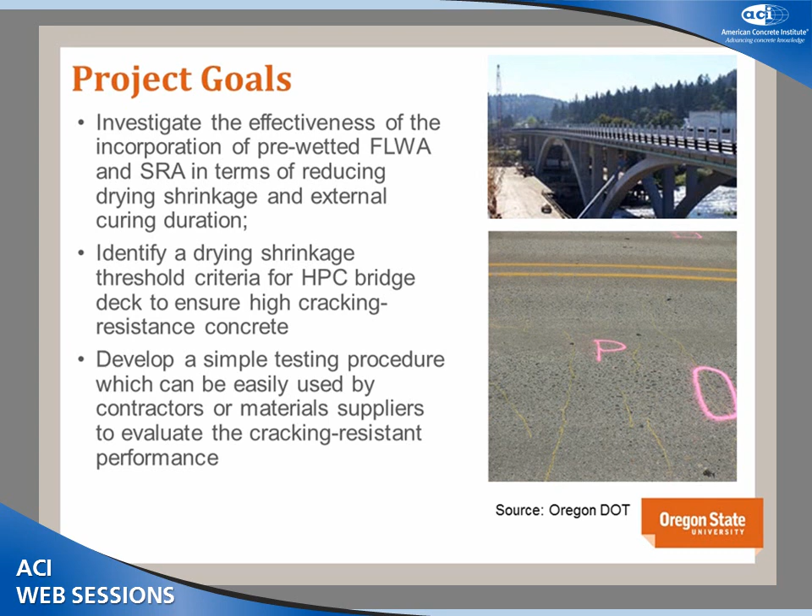And to that end, we want a pretty good mathematical description of the drying shrinkage and its development. So that's where this particular project comes in. We tried to find a model that will describe the drying shrinkage behavior satisfactorily for our mix with fine lightweight aggregate and SRA concrete, and also, hopefully, if you change to different local materials in the mix. And we pushed a little bit further than that. We looked at the ACI 209 drying shrinkage model and came up with a way to predict long-term shrinkage based on short-term measurements. So a combination of the modeling and the experimental work.

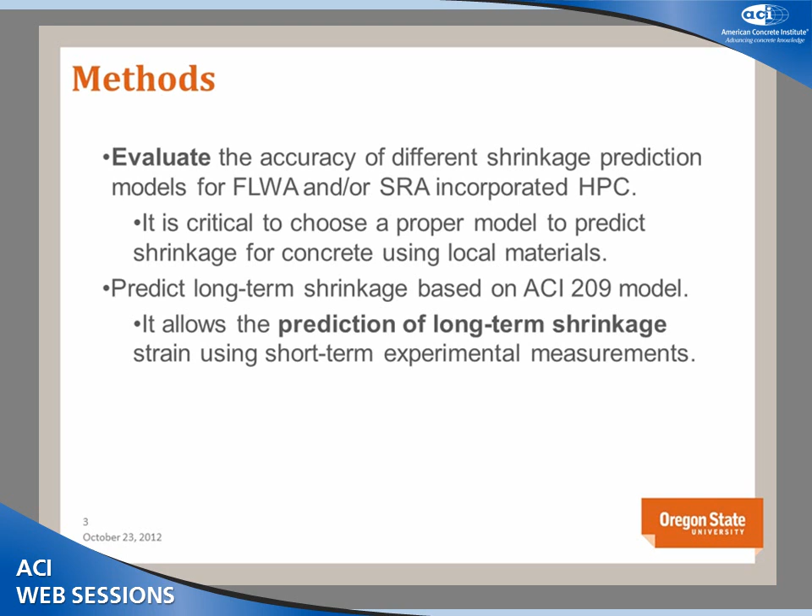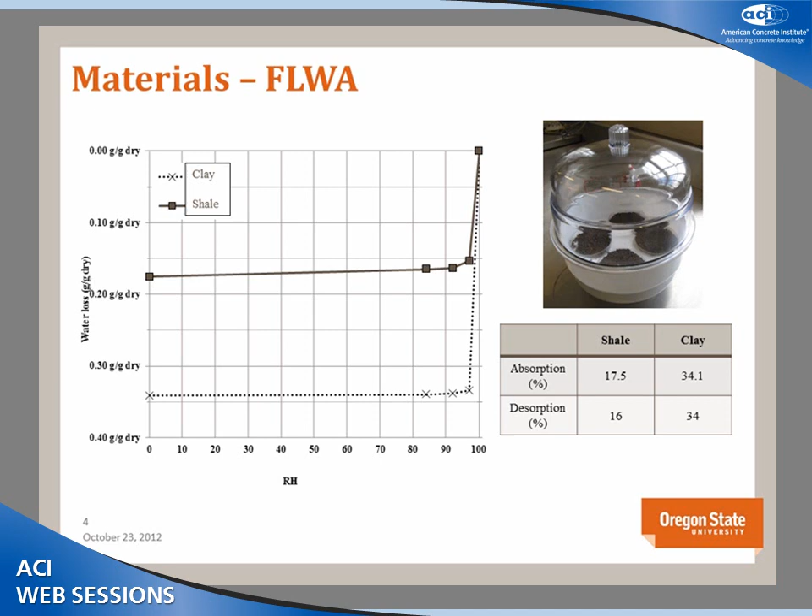A little bit about the material side. We have a couple of different sources of lightweight aggregate, mostly shale, but one source of clay. Most of the work has been done with one shale and one clay. This curve is the desorption test. The takeaway is that when the relative humidity drops below 95 or 96%, the lightweight really starts to give out most of its moisture. Another takeaway is that the absorption capacity for clay is almost twice as much as the absorption capacity of the shale. That's going to affect the calculation when you want to figure out how much lightweight fine aggregate you want to put in your mix.

So here's the mixture design. We use a cementitious material content of 633 pounds per cubic yard, and we kept all our mixture designs at a w/cm ratio of 0.37. And we use a ternary blend, which means we replace 30% with fly ash, that's class F fly ash, and 4% with silica fume. And in several of the mixes with SRA, there's a 2% SRA addition based on the mass of cementitious materials.

And also, if you look at this list, we have 3 different levels of clay replacement and 4 different levels of shale replacement. One point to point out is that the clay at 12% and the shale at 25% are identical in terms of the internal curing water they can provide. And that's based on the chemical shrinkage test and the equation.

And also, we wanted to push it, to really see what's the limit of prewetted lightweight fine aggregate. So we tried 100% shale. That means there's no natural sand in it, just 100% shale lightweight fine aggregate. And we also tried a 25% replacement of shale plus SRA to see if there's synergy going on there. And the targeted 28-day strength is 5,000 psi, 34.5 megapascals.

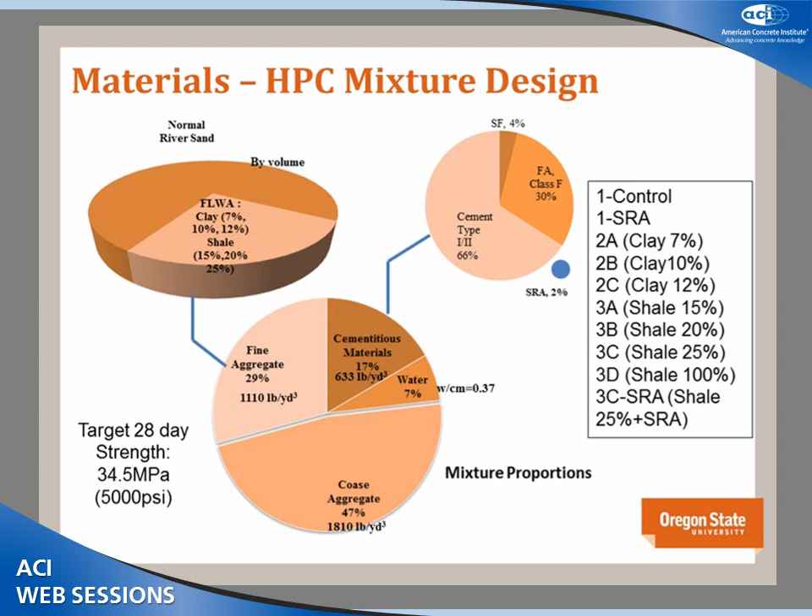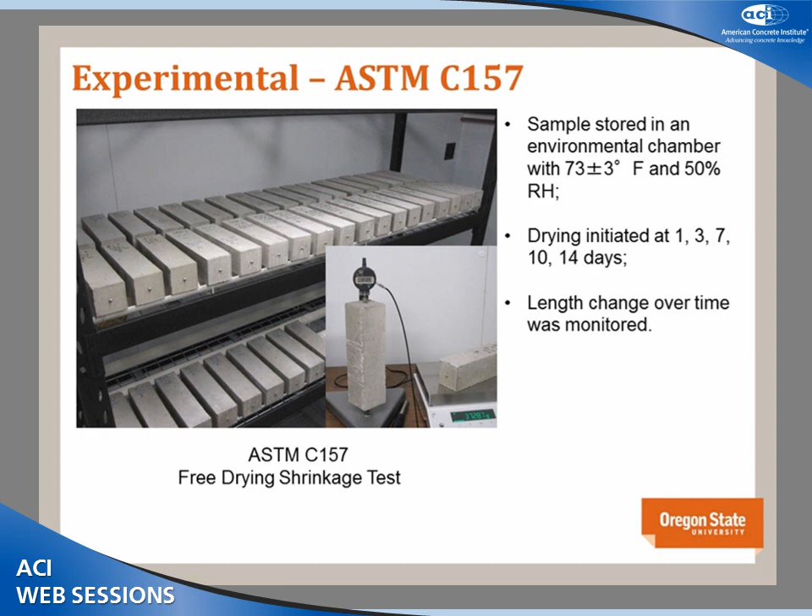So basically, a lot of work has been done just casting bars. We did a lot of ASTM C157 tests, which is the measurement of free drying shrinkage. We store all the samples in an environmental control chamber with standard conditions, and we start drying at different ages, from 1 day, 3 days, 7 days, 10 days, 14 days, and we keep tracking the length change. And each measurement is going to be a point for evaluation in the later slides.

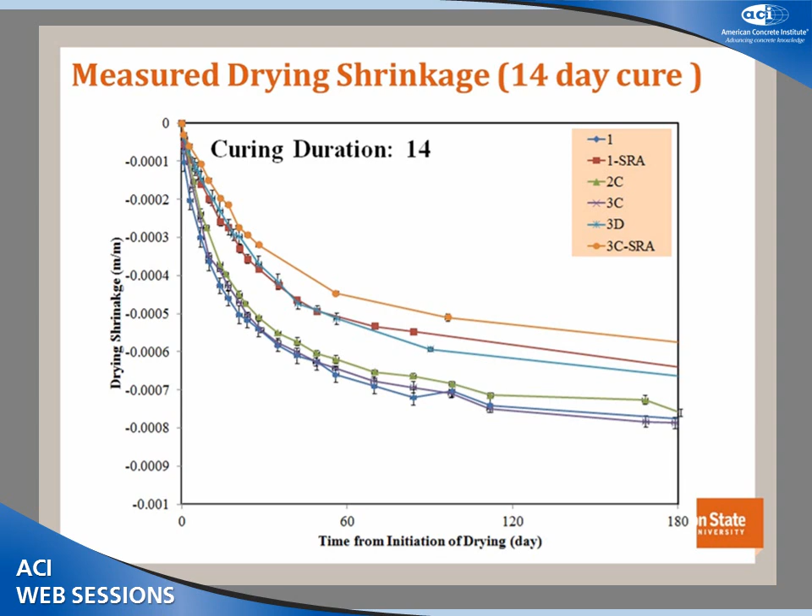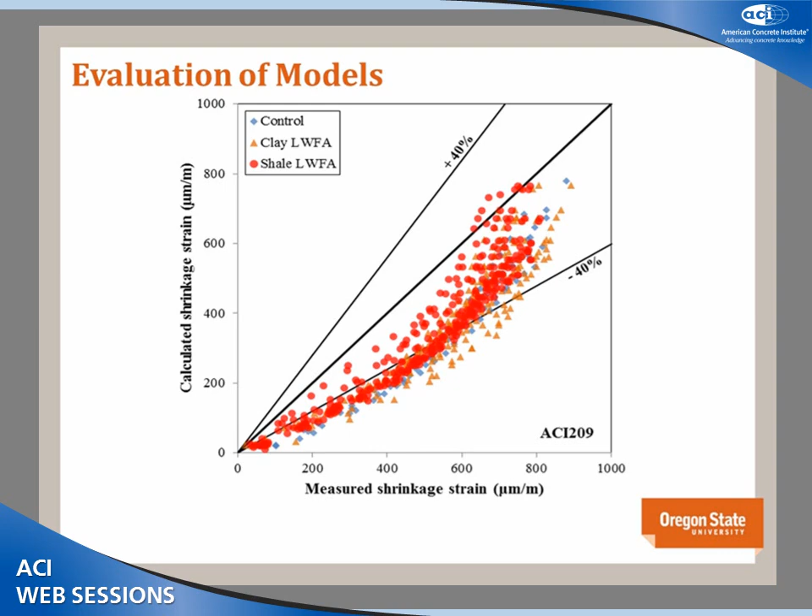This is the designation of the code. If a point falls on the diagonal line, that means a good prediction, and I also give 2 reference lines of plus or minus 40% difference. And up here is the legend. The blue diamond is the control. This means just pure HPC. The orange triangles are the ones with clay, the red dots are the ones with shale.

Okay, back to this. So 6 models we've been looking at. The ACI 209 model, the CEB 90 model, some people call it CEB 95 or CEB 99. That's from a later version of the European code. I think the newest one, which just came out in March, is called CEB 2010, which tries to combine autogenous shrinkage with drying shrinkage, plugging them into one equation. But I think the time function in that model is still pretty similar. That needs some work to update.

And the AASHTO code, which is mainly used for prestressed concrete girders, is really closely related to the ACI 209 model.

And the B3 model is the one with a theoretical basis, which tries to explain the physical mechanism behind drying shrinkage. And that model is very alive. I think the newest version is about to come out at the end of this year, then this model could update too. And also the GL 2000, I put slash here, ALSM model, because they work exactly the same when we look at concrete without SRA. And the ALSM model is developed very specifically for concrete with SRA.

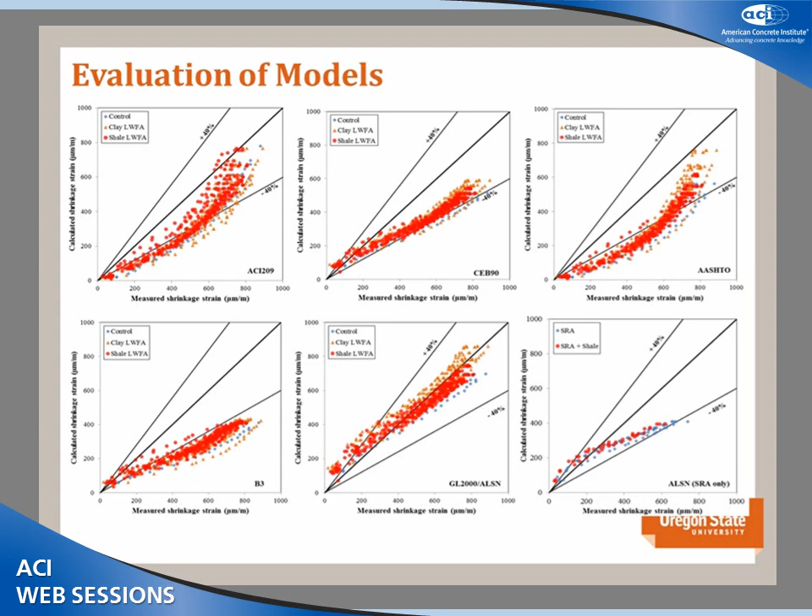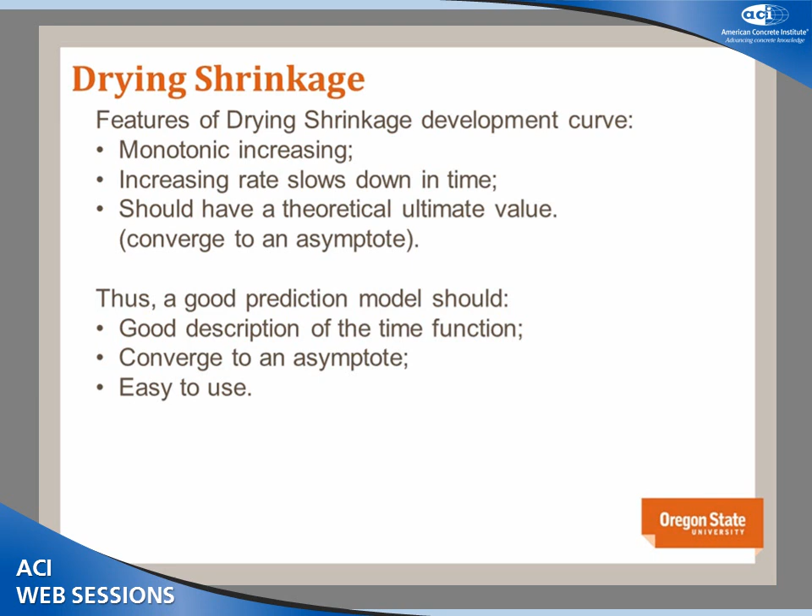So what if we can have a mathematical description of the model based on the test? Then we can predict the long-term behavior. That would be pretty cool. So first we look at, well, what's the characteristics of the drying shrinkage. So basically the assumptions are it is monotonic, the rate slows down in time, and also it should converge to a certain point, which makes sense that the shrinkage should stop somewhere down the line. So a good model should have an accurate description of the time function, as well as an ultimate value it converges to. And ideally, it should be easy to use.

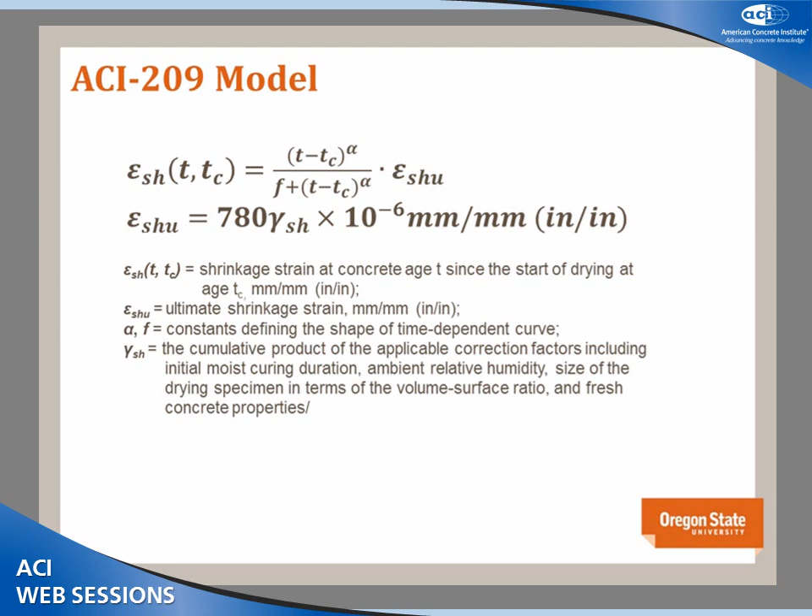So when we look at all the 6 models we use, the ACI 209 really caught our eyes. This is the full version of the equation. You've probably seen the simplified one with this factor set to 1, and this F factor set to different values for different concrete. But if you look at the full function, there are 3 factors, alpha, F, and the ultimate shrinkage value. If you manipulate those 3 parameters using regression, you actually can represent the time function of each of your mixes very well, and it can give you a reasonable ultimate shrinkage value.

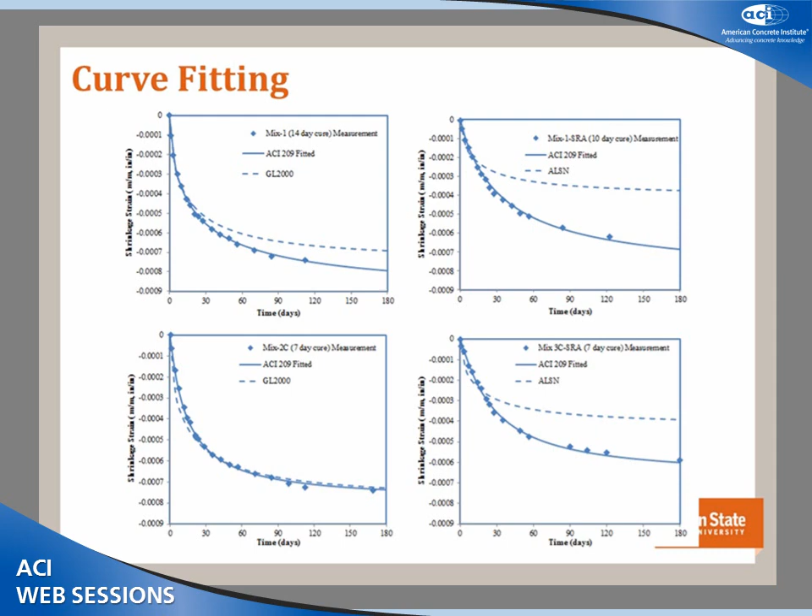So as an example, we just randomly selected several different mixes from all kinds of work we did. The dotted line is the actual measurement. And the dashed lines are the different models. The solid lines are curve fitted using the ACI 209 model. So they really capture the features of this line and hopefully can project to a longer term value reasonably well. And you can look at the left corner, the one with the GL 2000 model, which works pretty good. You can still see a little bit of improvement there. It really captures the time function of the drying shrinkage curve.

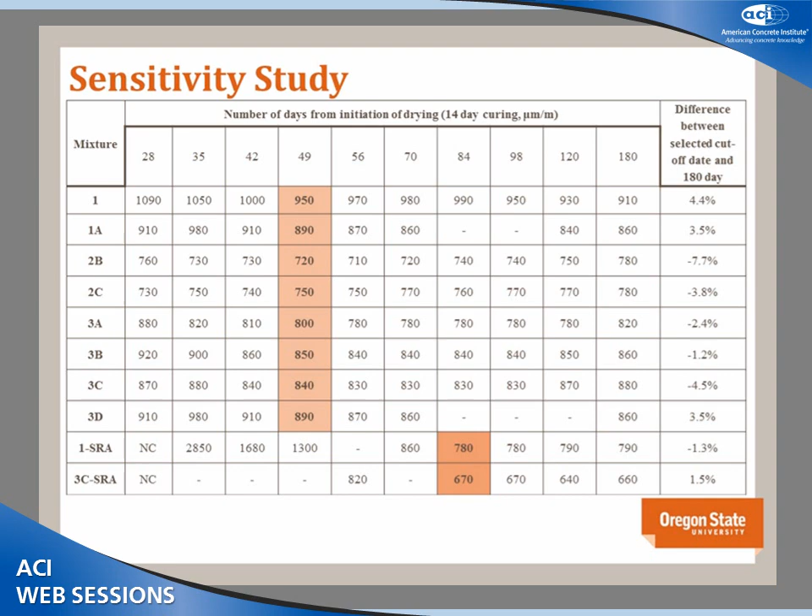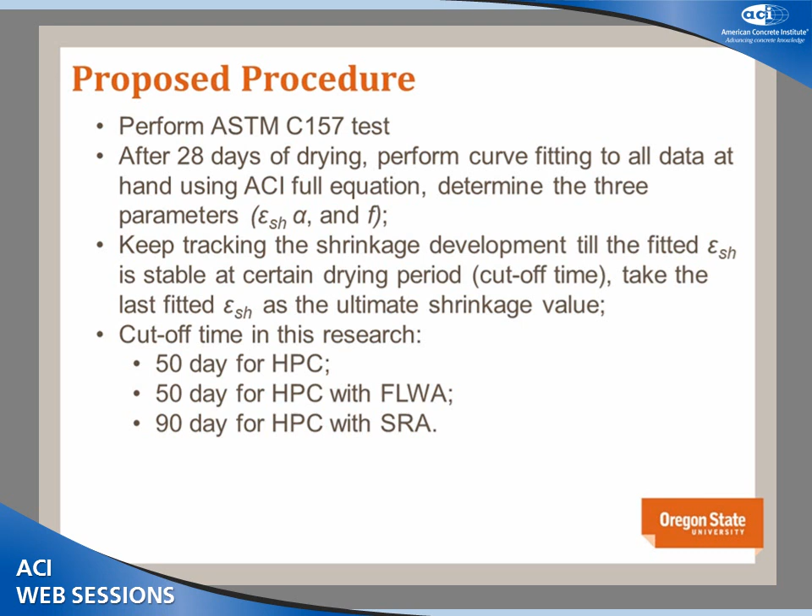Okay, so at this point, the proposed procedure. So you perform the ASTM C157 test, you keep tracking the shrinkage. After 28 days, you start performing the curve fitting. It means you plug in the data into the full equation, determine all the parameters, and find the ultimate shrinkage value. And you keep tracking those until you find it's stable. For our mixes right now, it's really 50 days for the HPC and the HPC with fine lightweight aggregate in it, and 90 days, a little longer, for SRA in it.

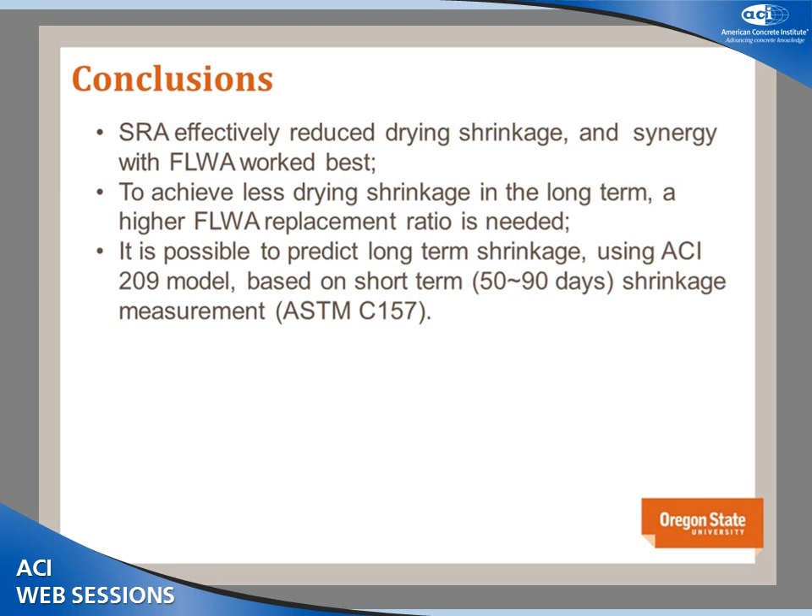Also, we ultimately want to use this model in the project we talked about at the beginning of the presentation, in the joint shrinkage criterion. We want to plug it into some program along with the ring test and all the other mechanical property tests.